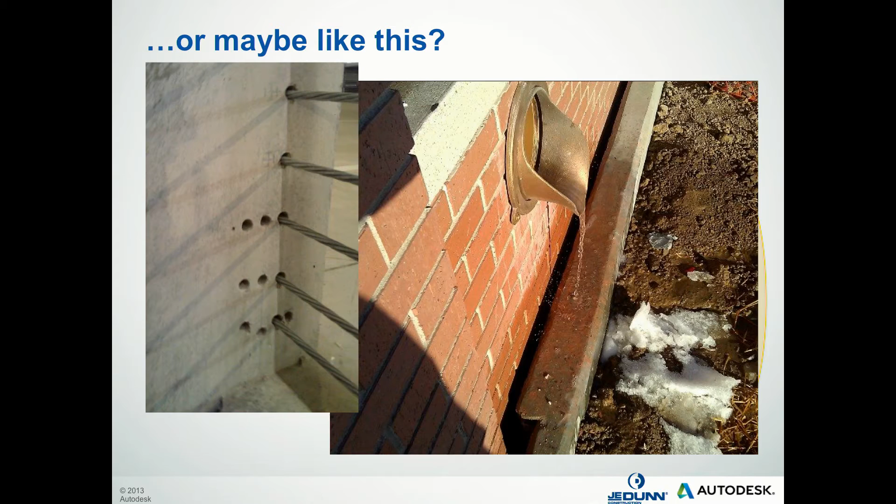Audience, real quick, so as we get started, we're going to ask the group a couple of questions. And maybe John can help me out with some of these because these are his questions. I want to ask the room, who here is in a project setting on a day-to-day basis, just by a show of hands? Okay, and who here is more like operational support on a day-to-day basis? Okay, so we've got pretty much an even mix.

What are some of the things that you've heard about lean or lean construction? Who wants to throw something out there? Maybe John can run over with the microphone.

Nobody's heard anything about lean construction. It's pull system. Okay, great. Eliminate waste and rework. Good. Toyota Way. Toyota Way. Perfect. Provide customer value. Provide customer value. Excellent. Anybody anything else? Anybody hear that it's expensive?

Anybody hear that it's hard to get buy-in? Anybody hear that you're kind of drinking the Kool-Aid? So there's two sides to the discussion, but ultimately the concepts we're talking about are very true. If we can get to a point where we're all working together to reduce waste and just be more efficient with what we do, be more collaborative about it.

Anybody been involved in a lean project? Anybody's endeavors, anybody's companies actively pursuing lean deployment? Wow. Anybody actually serve as a lean champion or a change agent? Couple of hands. We know who we're going to call on a little bit later. Exactly. Great. All right, fantastic.

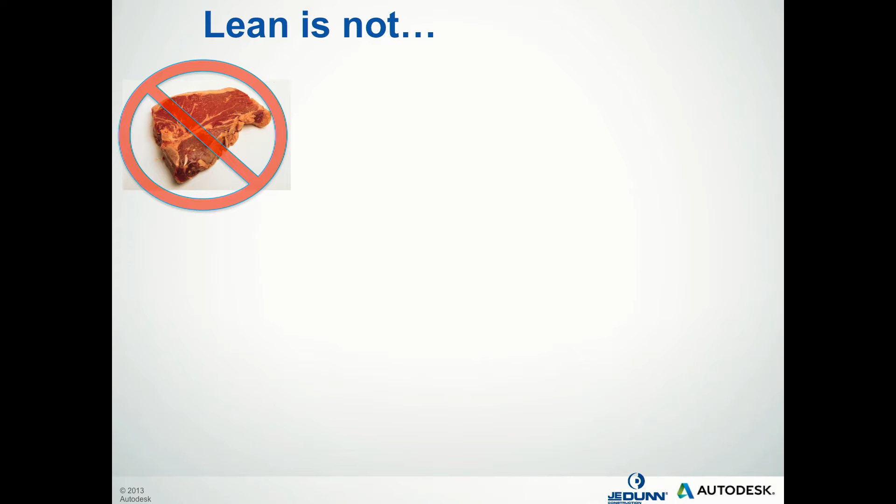Lean in and of itself is not just eliminating waste, right? Cutting off the fat, getting rid of the waste in the process. It's not equal to pull planning. We will talk about pull planning today, but pull planning is part of one of the tools that supports a lean project or a lean organization, but alone in and of itself doesn't make a project lean.

It's not a single process. There are a lot of different processes that you'll use in a lean company or a lean project, but it's not equal to any process in and of itself. This is my favorite: it's not an acronym. If you're writing it in all capital letters, you're just yelling, so please don't do that.

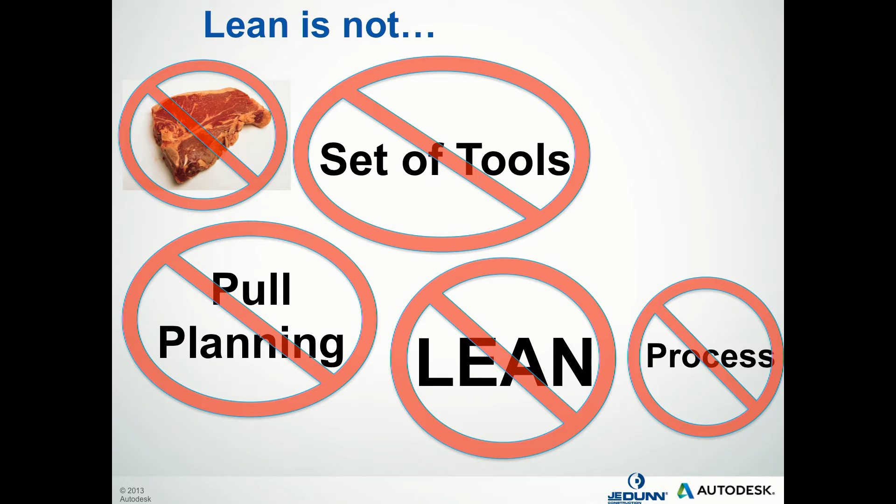It's not a set of tools. There are a lot of tools that we'll use in a lean project, but it's not equal to just the set of tools, and it certainly is not an easy button. Lean is something that takes dedication, takes hard work, it takes rigorous application. As a friend of ours likes to say, it's rigorous application of common sense on a regular basis.

When times get tough, especially because our tendency is to go back to how we have done things in the past, how we know how to do it, what's made us successful before. So what lean really is, is a philosophy and overarching culture. It's the idea that through continuously improving and respecting our people, we can drive ever-increasing value to our customers while eliminating waste. So that's a very, very basic definition.

We talked about whether we get into the lean principles in this session or not. There are, as many of you know, a lot of different lean principles that support the idea of lean. This is something that kind of just captures the all-around general, embodies the spirit of what lean really is.

The reality is, when you're really trying to create innovation and change, because I fundamentally believe that the construction industry is broken. I'm going to show you some stats on why I think that, and that we need to start radically thinking about a different way we deliver our projects on a daily basis, because there's just so much room for improvement, as John mentioned.

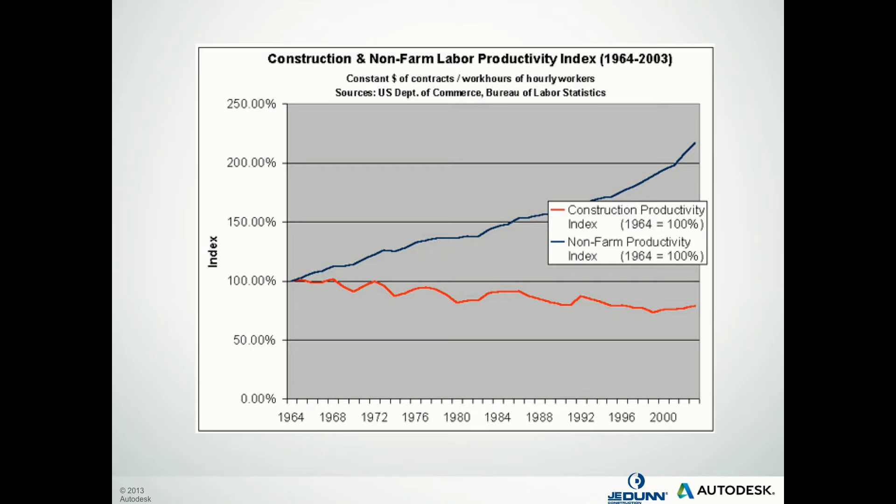In fact, studies have shown that 58% of time on a construction site is actually considered waste. That's waste from rework, which is a staggering number, unnecessary movement, and the average material handling on a job site—when some ductwork, for example, is delivered to a job site, it's moved an average of 7 times before it actually gets installed.

Just imagine all that waste put in place, where instead you could have a just-in-time delivery system and install it right when it's needed, in the right amount, with the right number of resources.

So if we can just take a small chunk out of this number of waste, we're looking at a lot of savings, especially in our industry where profit margins are already razor thin.

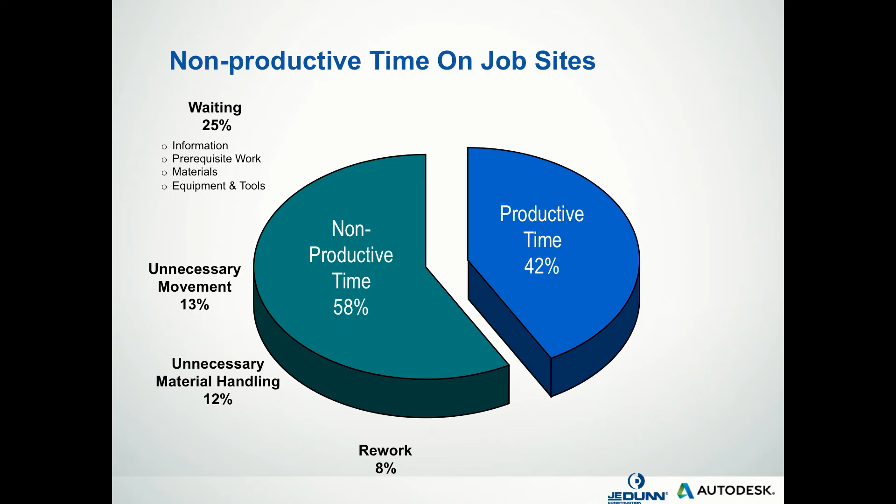Hopefully this gets the blood moving a little bit and gets people to get up and think about different ways to deliver their projects. So that's what we're here to talk about.

So real quickly, I wanted to go through some examples of waste on a construction site, and maybe you guys can think about some examples that you've seen. But some examples, for example, of overproduction...

You maybe have a drywaller coming in and putting up the entire metal stud drywall system, and then the electrician has to come back and cut holes because he didn't get his work in, right?

So he didn't properly sequence the work. And that example, it's not because these people don't want to do a good job. Every day we don't come in thinking, let's figure out ways to waste time and money of our owner. We're in a fundamentally dysfunctional system, and we're incentivized to protect our own piece of the pie. We're not incentivized to help each other, and that's just the way the adversarial relationship of traditional construction has come about over the last 40 years.

Another example is waiting, not only workers waiting for work, but work waiting for workers. Rebecca is going to talk a little bit about reliability and predictable workflow and why that's so important in Lean. You also have the example of inventory or stuff being delivered to the site.

One of my personal worst wastes, and the one that drives me crazy, and I know it drives the trade contractors crazy too, because I work with foremen every day, and they're really proud of the work they put in. They're craftsmen who've been doing this for 10, 20 years, the real experts in what they do. Having them come in and tear out something because it wasn't properly detailed, or they didn't have the right information when they were installing it, that type of waste just drives me crazy.

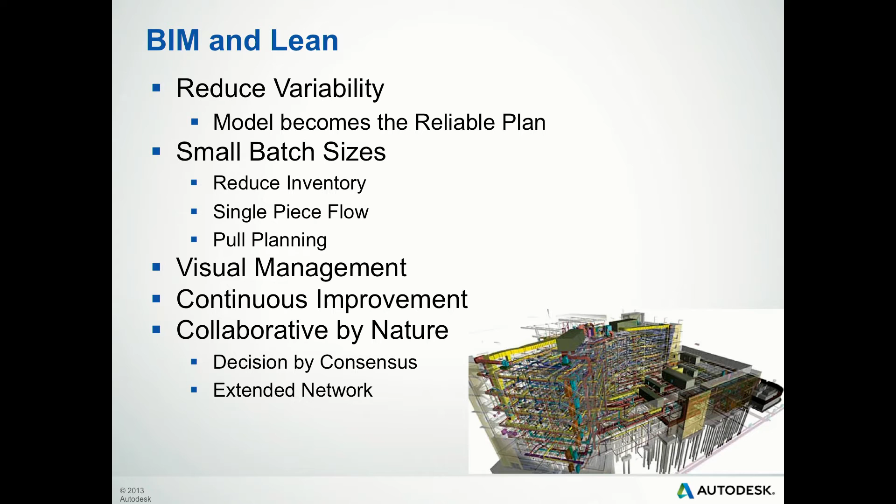I don't want to downplay technology, it's a very important part. And the BIM model can allow that collaborative nature to continue and really flourish on job sites if used in the proper system with the right leadership and direction.

I'm not going to go through all of these, I just wanted to flash this up on the screen because what Rebecca's going to go into is the Last Planner System. That was the other part of this learning objective today, to go through a lean methodology. But there are a lot of lean tools out there, and a lot of concepts, and this is actually only a fraction of them.

An example is laser surveying - you may have seen those Topcon devices out there, and what BIM 360 Layout is doing as far as taking points in the model and being able to lay them out in the field with incredible accuracy and time savings. That's a lean tool.

When you do this root cause analysis, they call it the 5 Whys - you ask why 5 times to get to the real root cause. That's a lean exercise that I know Rebecca does on her job sites all the time.

I mentioned earlier the integrated form of agreement. That's a contractual system set up to actually encourage collaboration because everyone's profit and risk is in a shared pool.

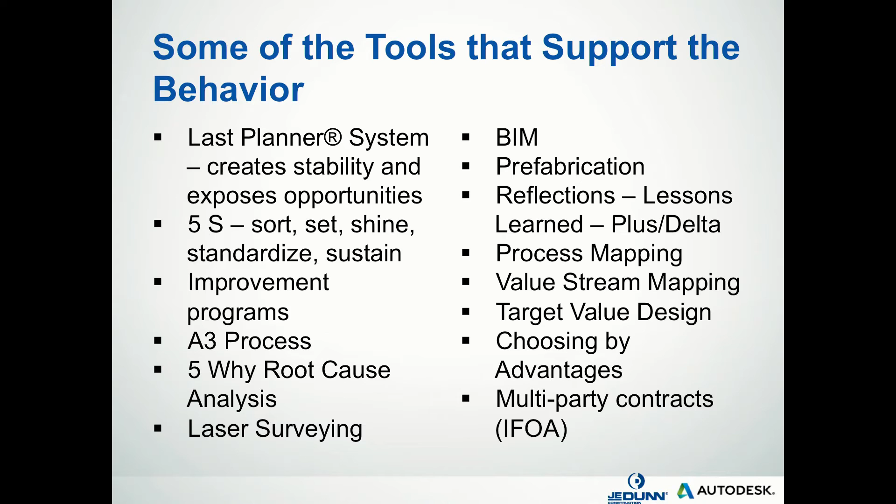We will talk a little bit about prefabrication, and Rebecca's going to go through a long explanation of the Last Planner System - well, long relatively, it's 30 minutes. She teaches full day courses on this. It's a really great framework for creating a lean project and methodology.

Rebecca mentioned earlier this idea of continuous improvement, and I just wanted to go through this planning cycle. Who's heard of PDCA or PDSA before? It's called the Deming cycle.

Actually, Deming credits Shewhart, believe it or not, so he calls it the Shewhart cycle. But this idea of planning your work - you say you're going to do something, you put together a plan, you go out and actually perform the work, you come back and see what worked and what didn't work, you study it, you adjust the plan, and then continuously improve onto the next step.

So real quickly, what are some examples maybe of you on your project teams doing this sort of continuous learning? Do you have any? Ralph, I know you're a big...

Ralph came from one of the largest lean integrated jobs in San Francisco at Cathedral Hill. They were in design for a while, and they're finally in construction. Do you have an example?

Well, there's a simple example. I oftentimes come in the morning making coffee, and I was really upset that the process took me so long because all the stuff was dislocated all over the kitchen. So I rearranged the whole thing, and I reduced the time for making coffee by probably 50%. So this was continuous improvement.

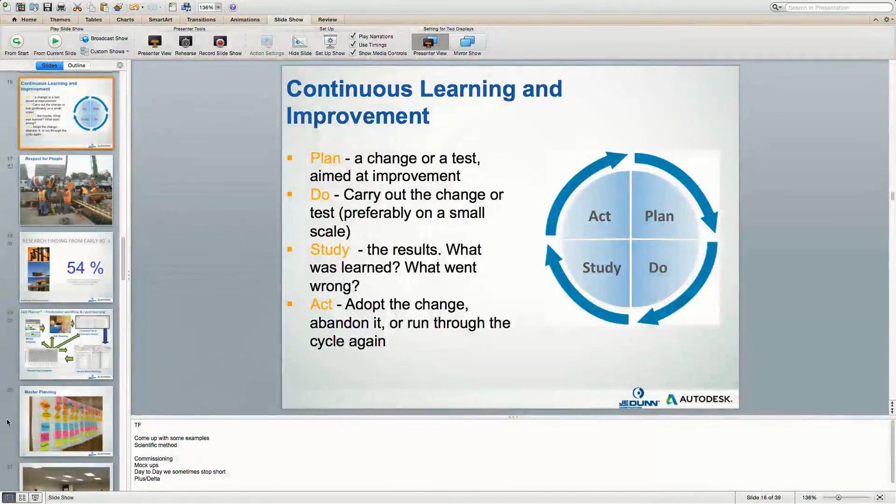What did I just do? Uh-oh, I just clicked that button. I did that once too. I'm not sure how to try it again. Click it. Uh-oh, there you go, just put it back on. Okay, there we go, if I can get it back up. Okay, don't do that again. Here we go, sorry about that. Getting excited, talking about lean.

Not as excited as Paul Akers, though.

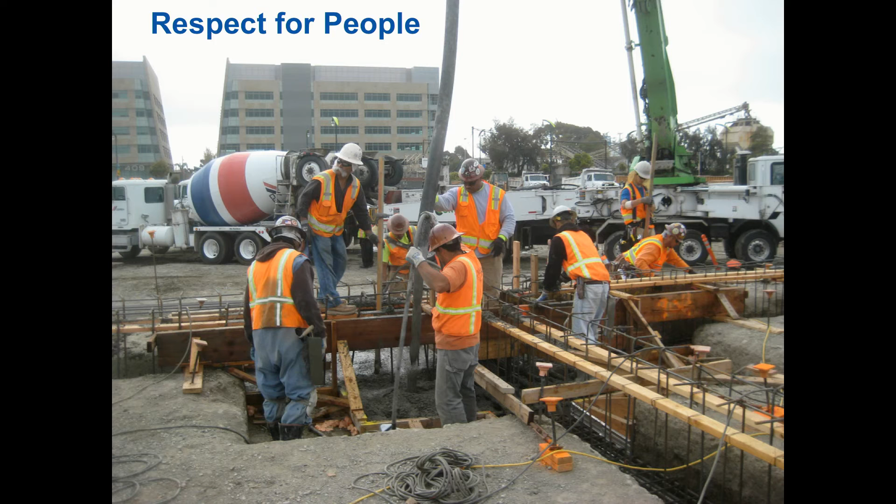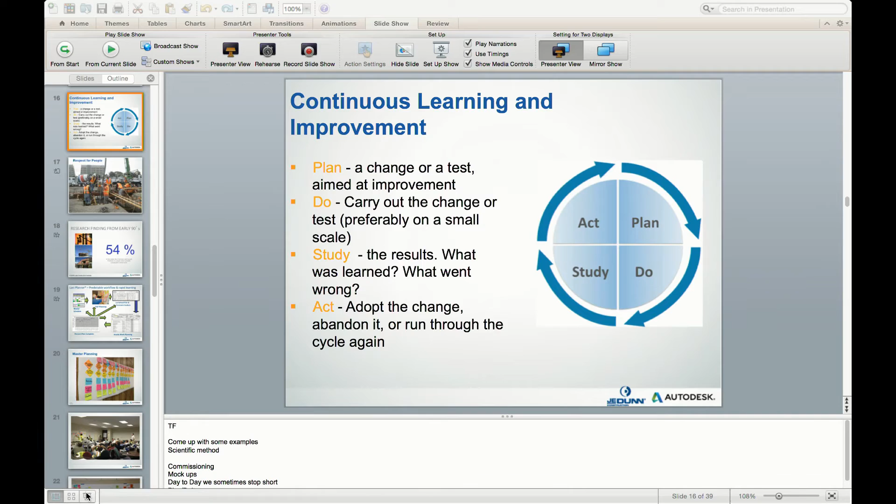So the other concept that Rebecca mentioned is this idea of respect for people. The reason why continuous improvement and respect for people are kind of the foundations of lean is because these guys in the field who are coming in day in and day out doing the work, doing what we call in the lean world value-added work, they're the ones the owner cares about. If you spend all this time coordinating and putting together details - no offense, because a lot of people in this room are doing these supporting activities, that was me, sorry - that are supporting this value-added work of the guys in the field.

And those guys are the real experts, right? Those are the guys that I think will come on after this. Those are the guys that are delivering what the owner wants: a finished building, a roadway, a sewer system. So really our role as management - because I think most people in the room aren't actually wearing tool belts, I'm assuming - our role is really a servant leadership role.

This concept of servant leadership is turning that paradigm of the traditional manager, team, and workers below, upside down. You're actually supporting those guys in the field, enabling them to get the right set of drawings, the right tools, the right labor in place so they can do their job without constraints and do it perfectly. They'll make mistakes, but if you enable them with the right tools, people, processes, and systems, you really allow them to speak up, because a lot of these guys, believe it or not, have some of the best ideas on the job site.

Toyota uses this A3 system. An A3 is just a one-page, 11 by 17 piece of paper where they submit ideas for improvement. They get most of their A3s from the guys actually on the production floor. They'll do this thing called pulling the andon cord, where they stop the production line - which at GM and Ford was unheard of, you've got to keep uptime and all this.

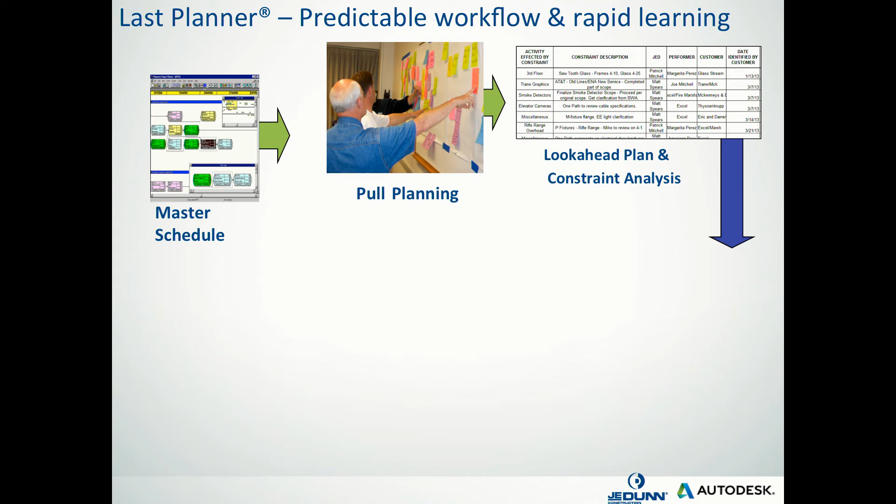The next piece is you take that pull plan that's been planned out and look ahead, particularly at the next 6 weeks, to identify what are those things standing in the way of getting that work done. So we can take that work from work that we should do to work that we are able to do. We call those things constraints, and we work with teams to get them removed.

Then we go into a little more detail on a weekly basis with the last planner saying, okay, I've got this work in my 6-week look ahead, and next week I'm going to do exactly this. I'm going to finish the framing on the in rooms 4 and 5 on the 3rd floor on Tuesday. We work with all of the last planners to understand their work as commitments from one person to another, so that you are actually building that system of reliability.

Then on a daily basis, they check in with each other and tell each other what got completed and what didn't. And we measure something called the percent plan complete. So if we had 10 items planned for that day and we got 8 of them done, we had 80% plan complete.

Now, if you go back to when Tom was talking about plan, do, study, act, or plan, do, check, act — this piece here, master schedule, pull planning, look ahead, weekly planning, that's all the plan part of plan, do, study, act. Then we actually go do the work, and then we check it and study the results. We check on a daily basis, did we get it done or not? And what is the result? If we didn't get it done, what can we learn so we can improve how we're planning the next time? That's the key piece to continuously improving how we use the last planner system, how we plan our work reliably together.

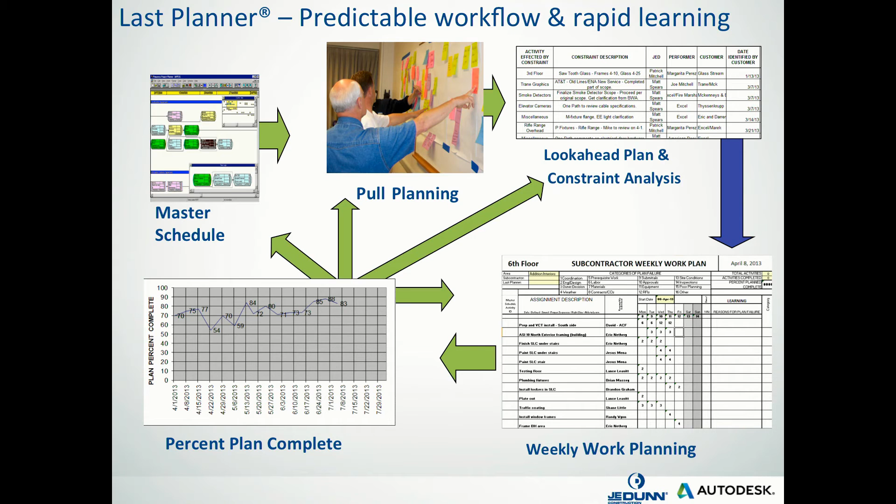I'm just going to show you some quick examples, and again, there's a lot of different ways to use a lot of these parts and pieces of this.

Then they sat there and first of all planned out when are we going to do the pull plan for that milestone — let's put that on the calendar. Now let's talk about what all those activities are, because a milestone, how you define it, can mean something different in different people's minds. A building dry-in, some people might think means you've got temporary windows in. Other people might think it means you've got windows and 2 rounds of caulk in.

So we get clarification on all that and alignment. Then we identify the long lead items and whatever submittals are needed. That enables us to have a big picture view of the overall project. Then we move on to pull planning. We take each one of those milestones in a different session, and again, we work to plan that out together as a team.

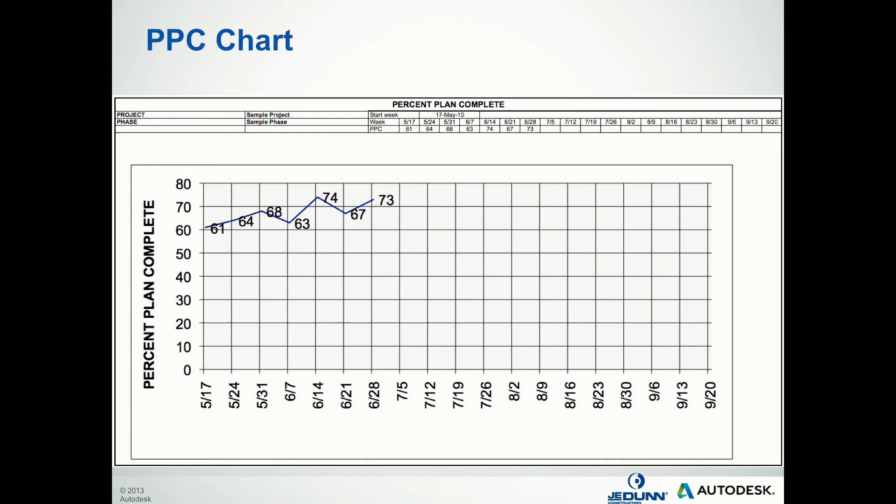There's some folks that say, oh, if you hit 80%, you're good. You always want to keep aiming for 100, because that's what continuous improvement's all about. If you aim for 80, you'll stop at 80. You want to aim for 100.

Fun little story. Before I came to work for JE Dunn, I was a consultant, and I worked on projects around the country. There was this small 10,000 square foot addition, and the superintendent and project manager from JE Dunn called me up and said the owner on this project said this needs to be a lean project, and we don't really know what that is. Can you come help us? I said, sure. Why don't you give me a little bit of the details? Tell me what's going on.

So they're telling me all about this project, and the superintendent says, Rebecca, the owner wants this done in 6 months. I've been doing this for a long time. I'm really good at what I do. I'm not trying to give myself too much credibility here, but I'm pretty good at this. There's no way we're going to get this done in less than 7.5 months, probably 8. And that's if we have perfect weather. This is in Atlanta in the springtime. There's no way we're going to get it done in 6 months.

I said, okay, well, what did you tell the owner? They both said, well, we told him 6 months. Awesome, thanks. I said, I'm not going to make any promises, but we will do what we can to get this going. And what I learned later was that the owner had actually come to them and said, we want this to be a lean project. They had been through design, so they were about ready to start construction. He actually said, I want you to sign an integrated form of agreement. And some of the trades offered up to them too, so they were kind of, which there's better ways to do it. Those owners in the room, talk to me, I'll help you out with that.

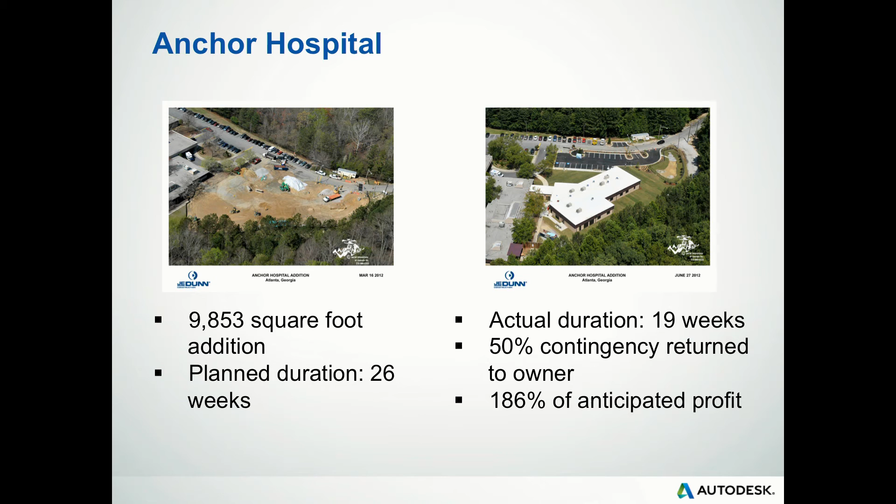But now he's on his 3rd project, and he won't do a project without lean. Now he's on a $400 million data center. So this stuff works when you've got the right folks putting their mind into it.

So Tom's going to tell you a little bit about some of the other tools that support lean. And again, with any of these tools, you can use them properly with the right behavior, or you can use them improperly with the wrong theory behind it and really screw some things up.

So how many people have used prefabrication on their projects? Real quickly, how do you think prefab is lean? What are some examples from what you've heard about what lean is?

Less waste, okay. On-time delivery, okay. Optimized material use and labor, right? Controlled environment, less movement, yep. Oh man, you guys are ready to teach this class.

So everything you said are great examples. When you're in a controlled environment, you're using the right labor to get the work done safer because you're not out trying to coordinate work with trades tripping over each other. You can deliver it onto the job site on time, like someone mentioned, and you're not having maybe the master craftsman doing stuff that a laborer can do. So you're saving money, saving time, and delivering a higher quality project that's better coordinated and safer.

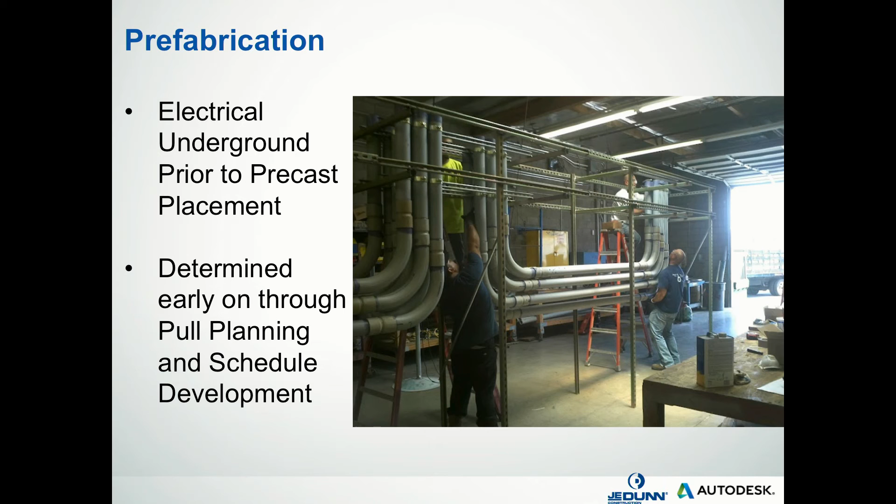Prefabrication is a great lean tool that a lot of companies now are using more and more. This is an example of underground electrical prior to the precast placement, and then when it was actually delivered onto the job site, we were able to just put it in place, surround it with some infrastructure support, and then put into place.

Another example from another project is this idea of a prefabricated shared racking system. This is the mock-up of what they were going to put in place. They called this, on this project, mechanical art, because it was an exposed ceiling system. So the trade contractors all worked together—there's electrical, engineer, plumbing, obviously ceiling, there's a mechanical system.

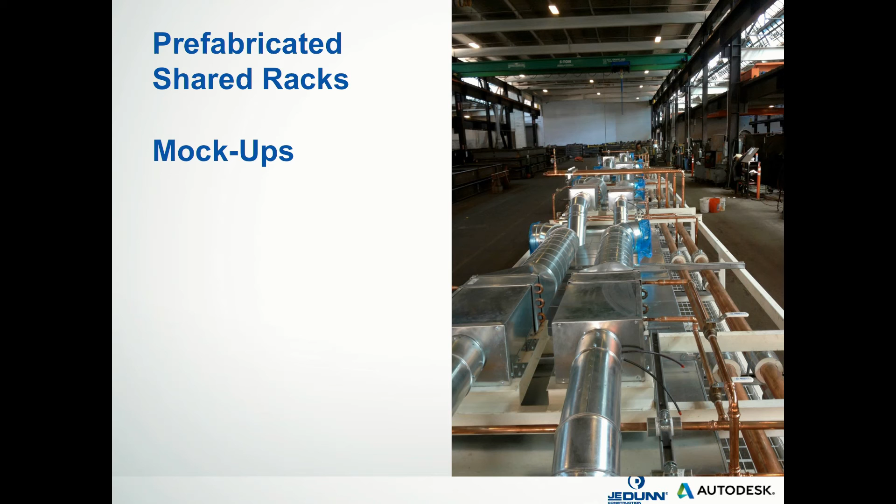They all worked together to put it in the same racking system and presented it to the architect, and basically we were able to leverage BIM, again, another tool, to say, hey, this is how this is going to look when we go to install this exposed mechanical art. I would argue this probably wouldn't have worked without BIM, because the architect really couldn't imagine what they were talking about without this mock-up.

Which is another lean methodology, continuous improvement. This idea of plan, do, check, act. The reason why people do mock-ups on job sites is to say, hey, this is what we're planning on doing.

They test it, they put it together, they find the leaks in the system, and they go fix that so that when they go out into the job site, they actually can deliver a lot of repeatable work over and over again, and it's tightly coordinated.

So this is just another example of really teams collaborating together. They would have never thought of this if it wasn't the right behavior and process put in place to say, hey, we can actually work together to form a racking system where all of our equipment can be put in.

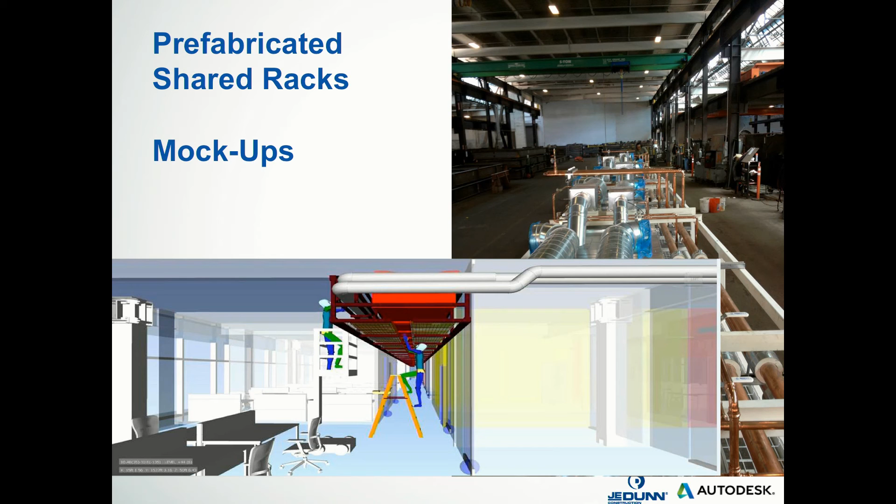And again, that's the whole people-process piece that I was talking about. Because in a traditional project, everyone was just throwing their stuff up. It would have looked like a mess. They would have just gone in and got their piece of the pie done. But with this collaborative environment, they will achieve something like this. So I thought that was another great example.

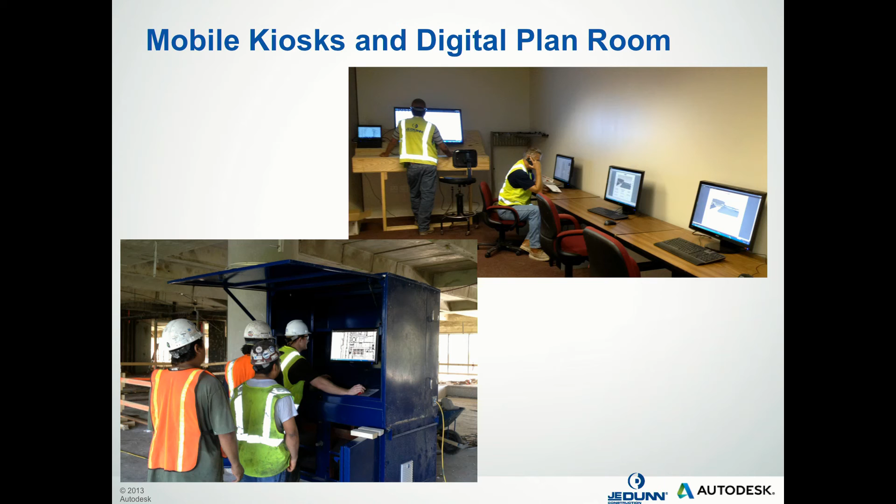Mobile kiosks or digital plan rooms. Again, the ability to leverage technology at the point of construction. So you have people, again, less movement, not going back to the job trailer to coordinate the most recent set of plans. Everything's at their fingertips at the point of construction. So you have people planning, coordinating their work, and obviously leveraging mobile tablets.

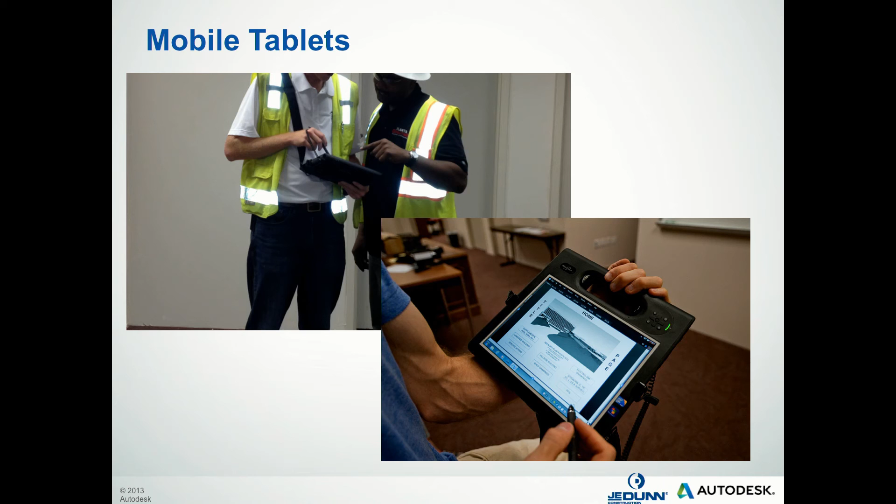How many people have actually got mobile iPads or tablets in the field? So being able to leverage technology to have the people in the field anticipate and act on issues as they arrive, and then the ability then to communicate that back to the back office so that they can optimize and clear the path for them and remove those constraints, as Rebecca mentioned. So again, technology playing a huge role in the ability to leverage their ability to work in a more lean way.